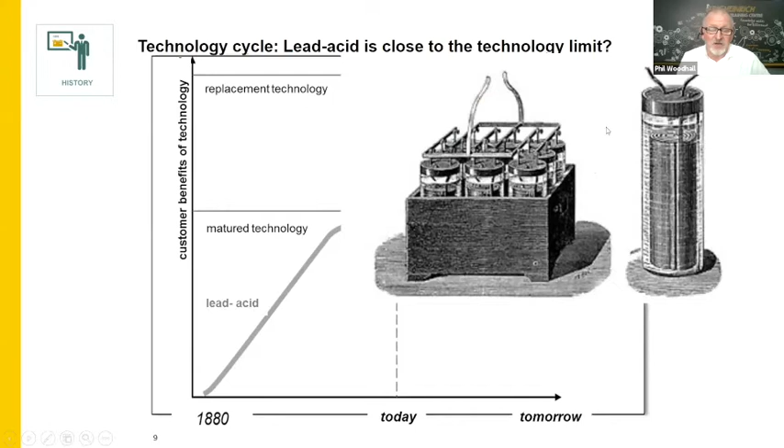And when you look at a lead-acid battery from then, it was still the same as today: two plates, positive and negative, immersed in an acid and creating a current. When you look at that from where it is today, nothing's really changed in terms of the concept of the battery. It's still creating a chemical reaction.

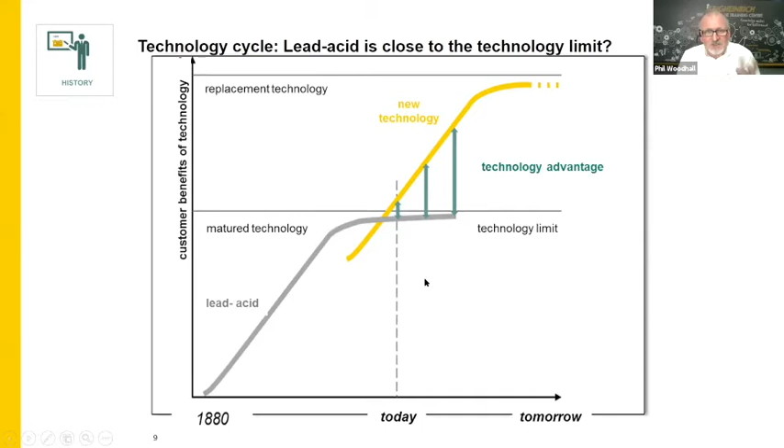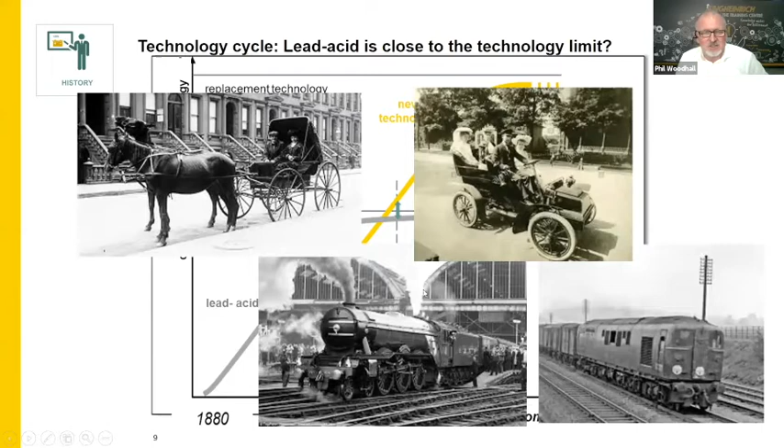Now, as time's gone by, the way that we charge and the charging technology have changed, but we're now at this step change in society, whether we like it or not, where we're looking for alternative fuel sources, not just from lead acid, but that can take over from byproducts of crude oil, such as LPG and diesel. That step change is the same size as when we moved away from horse-drawn vehicles to motor cars, or from steam trains over to diesel trains. Where we are now is that step change in society that is making a significant difference.

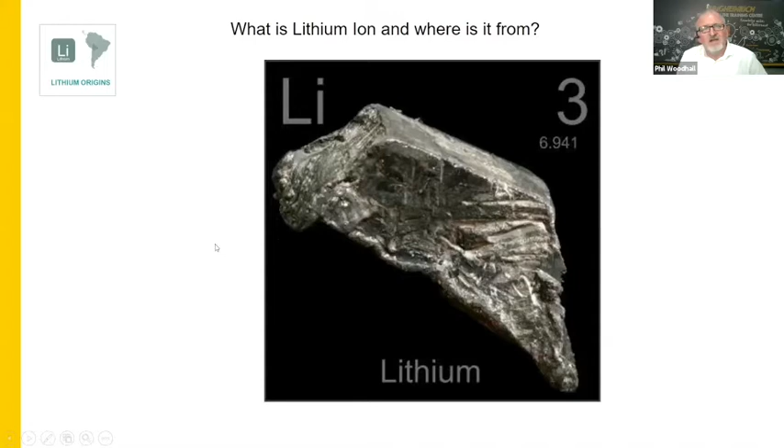So what is lithium and where do you get it from? Well, lithium is actually the lightest metal on planet Earth, and we need metals to create that chemical reaction, so that's a metal that delivers a higher density of power, but it's also much lighter. Now, when we look at where it's coming from, it's actually coming from the central equatorial belt. So any of the hot countries across the equatorial belt, you'll find it's available from, but the biggest resource globally is actually in Bolivia.

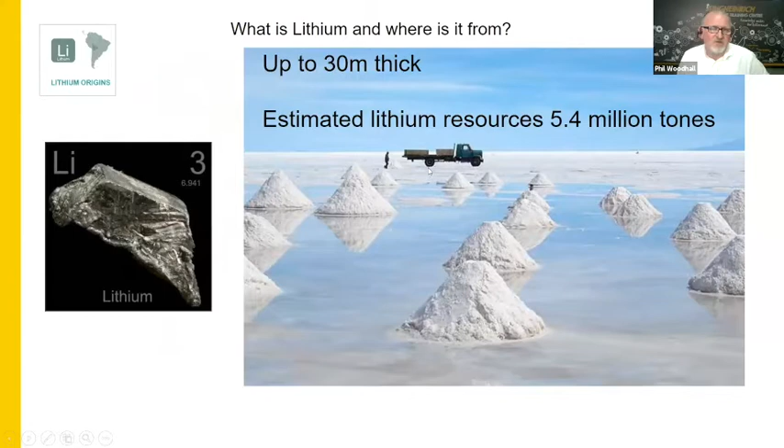When we look at what it is, it's actually a salt from a dry lake bed, but in terms of the resource, we're only using trace elements in lithium-ion, and it's not just in batteries. We've all known it for a long time with our digital watches and smartphones, but when you scale it up for forklifts, we need to know that it's a resource. There's actually more raw lithium than there is crude oil on planet Earth at the moment, so we need to look at this as a sustainable resource for the future.

And whether we like it or not, climate change is here, it's real, and we've got to take it on board ourselves, each one of us, to make sure that we are a part of that. So when we look at the future and how things have changed, I wanted to link it to the automotive industry, just to give you some ideas as to how fast things are changing.

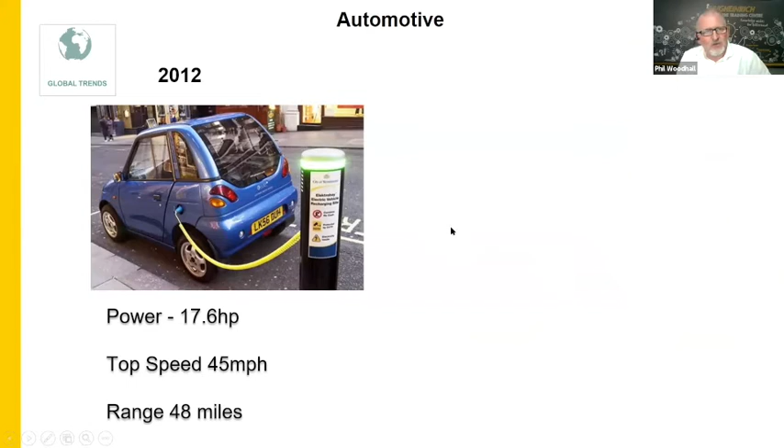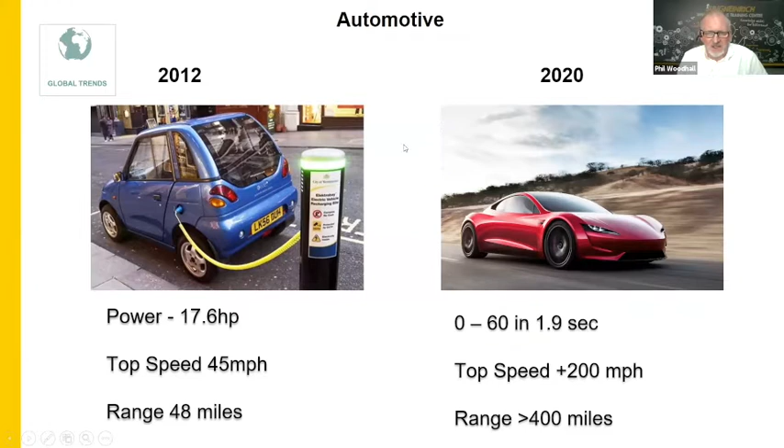A typical electric car from the late noughties through to 2012 looked like this, through to what we all know today. And we all know that the speed of change in just these 8 or 10 years is very, very significant. And the same is happening in our world as well, in the materials handling world.

But if we look now at lithium-ion, lithium-ion is the only battery that recharges faster than it discharges. So now we can start to harvest power, and from anything more than around 10 minutes, we can harness that power and put it straight back into the battery. And now we've got a resource that will actually start to serve us greater over a given period. Because of the density of the electricity as well, it will last far longer.

So instead of a lead acid battery lasting 1200 to 1600 cycles, which is probably around the 5 to 6 year mark, lithium-ion, because it's a denser supply and doesn't need any maintenance, will run for probably 7+ years. So you're going to get far, far greater use out of that energy resource.

So as we move on, you can see some of the benefits there: it is a sustainable source that gives us better energy density, but without any of the maintenance that's always been associated with lead acid. So let's have a look now at how this changes the truck design when we're working with a battery that is much lighter and delivers much more power.

If you take a traditional lead acid battery and you're designing a truck, you always had to work around the big box of the battery that was the bulk and in the heart of the truck, and then design the truck around that. So here, for example, you could take a lead acid truck and put a lithium-ion battery into it. But as time's gone by, what we've learned is we can actually change the whole design of the truck and make it completely fresh.

So here, for example, in 2011, Jungheinrich produced the world's first series-produced lithium-ion truck. What does this mean? That truck in that guise is not available as a lead acid option. It is a small battery, at that time 14 kilos, and the concept was to simply take the battery out, put another one in and send it straight back to work, and again that battery would charge very quickly.

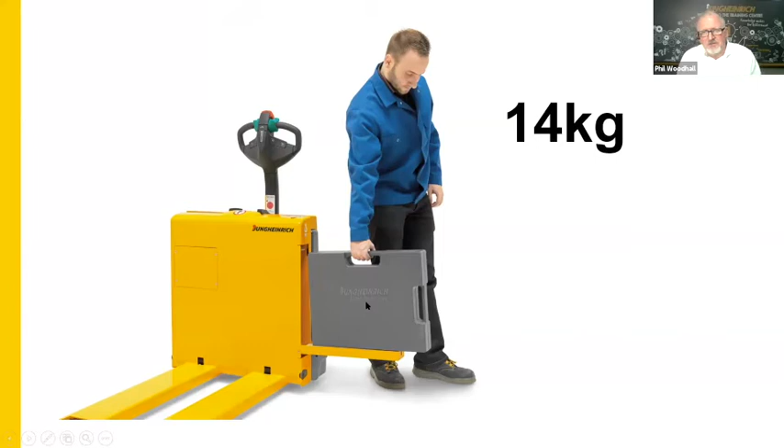As time's gone on, we've continued to develop it through the range, and then in 2017 Jungheinrich produced the world's first series-produced lithium-ion reach truck. And what you can see here is, again, not available as a lead-acid derivative. Now look at the shape and size of that battery.

If I just run a short animation here to compare the two side by side, on the left-hand side of the screen you'll see a lead-acid versus the right-hand side where you've got the lithium-ion. Now, as it pans round, you'll notice that on the left-hand side, it's the battery that's forming the weight, but on the right-hand side, the weight is made up by a cast iron counterweight. What this is doing is throwing the center of gravity much lower.

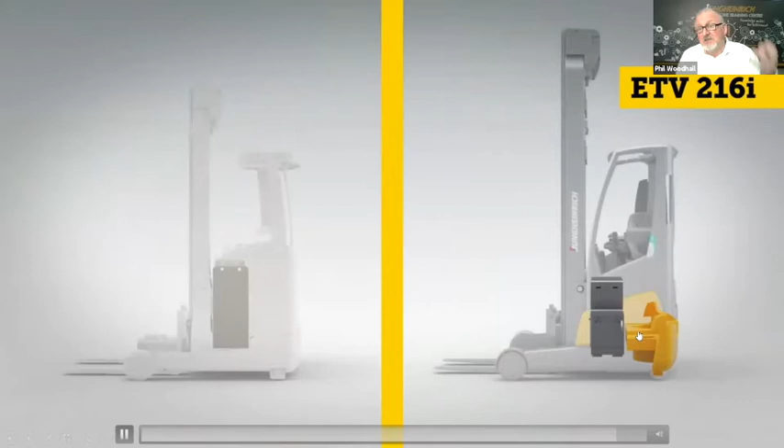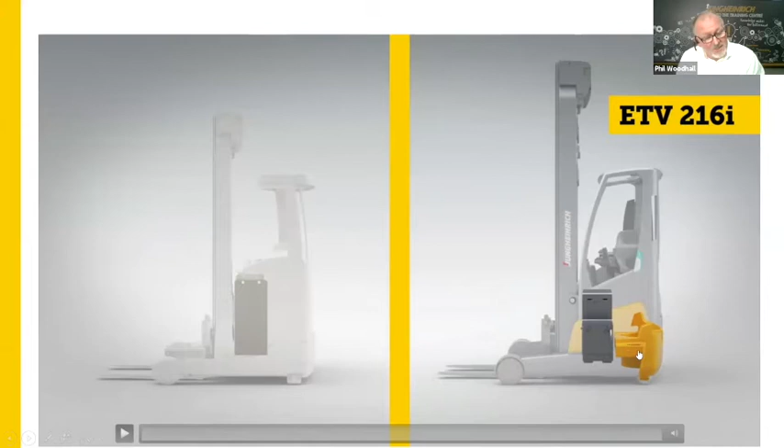Now, we all know as instructors that the lower the center of gravity, the better. Let me ask you a question. How many tall racing cars do you see? Not many, because a lower center of gravity makes things much more stable. So when we look at the design of a reach truck, it gives you better visibility all the way around because you've now put the battery much farther down into the chassis.

Looking to the future, in 2018 we also created a stand-on straddle leg truck where the battery is not forming any part of the counterweight, and again, it's only available as a lithium-ion derivative. What that means is that the weight is low down in the center, and you've now got a stand-up truck which allows the operator more space to work. And again, it's just completely breaking the mold as to what we've done before. Looking ahead to the future then, a sneaky peek for you.

If you look here, you can see a diesel truck. It's a diesel truck because you can see the exhaust stack. But if we now compare that to the new truck that Jungheinrich is producing very shortly, which is the Jungheinrich EFG P30i, exactly the same chassis, exactly the same mast. Everything is the same, but now this is lithium-ion powered. Performance numbers will be exactly the same.

So now you can see, here's the truck, how do you want it powered? So looking forward, you've got there a counterweight, and you can just see on the animation there, the battery is within the counterweight. So again, completely breaking the mold as to what's gone before. So that's looking now about the trucks in the future.

What we'll now look at then is about automation, because there's a lot of time now where we're talking about automation and what this actually means. We all know that we can sit there at night at home and order something and we expect it to be delivered the next day. But how does that happen? Well, I just wanted to point out that first of all, automation is not necessarily something that's new. Jungheinrich have been doing automation since 1963. So any operation over time that has always been repetitive, automation has always been there, a solution that's available for everybody.

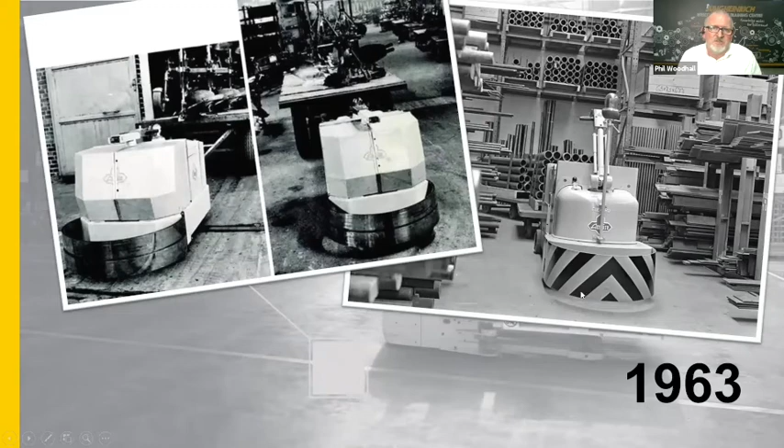Now, we already know about a manual operation because this is somebody sitting on a truck and driving it and moving product through a warehouse. But then you have two others, which is semi-automation and full automation. So these are the two I wanted to touch on. Now, any of these automations, whether it be full or semi or even manual, people now are looking to find marginal gains within their business that can make a significant difference to an operation.

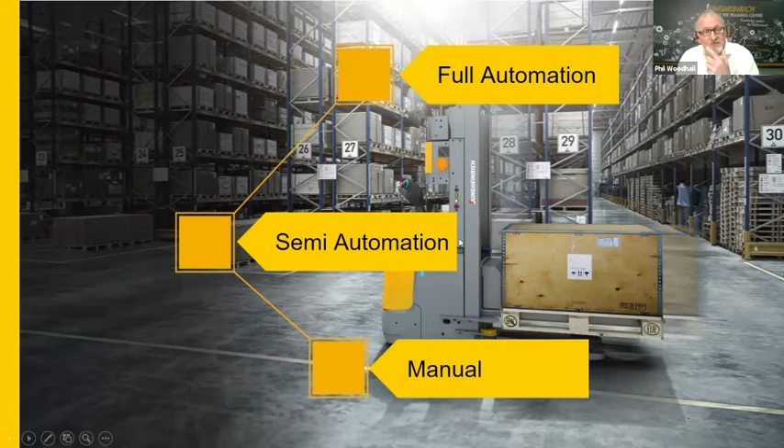So if we look at semi-automation and we consider this here where we've got a man-up order picker, we'll know that the lower they stay, they can travel fast, and as they start to lift, they then need to slow down. Or they can go up sooner and take the top line, but then that may take a little bit longer because they have to slow down.

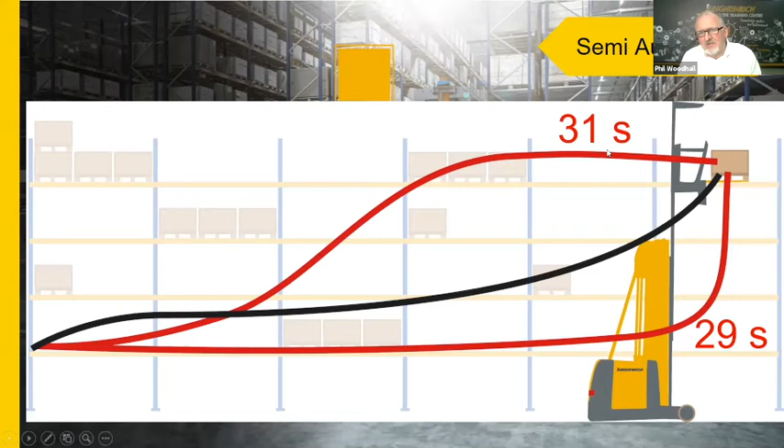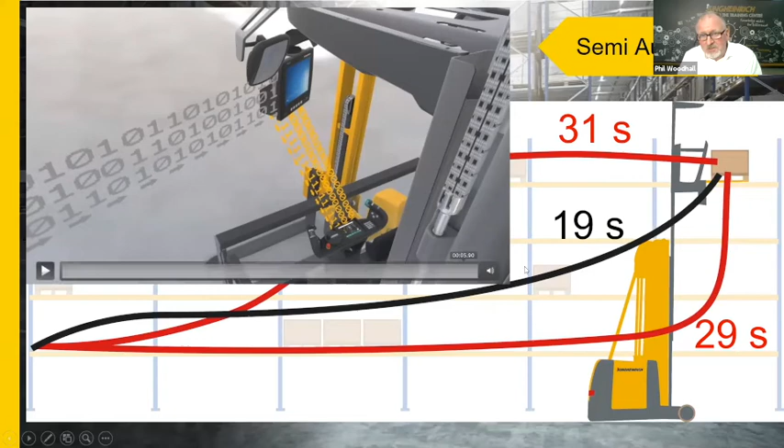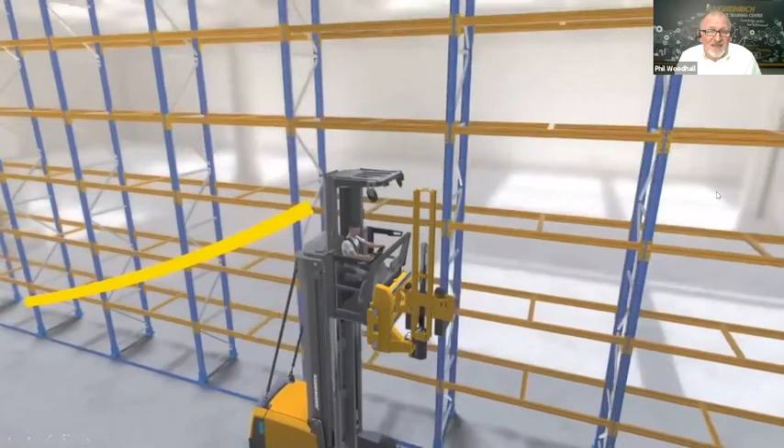Now, what's happening with semi-automation is where you have a signal coming from the warehouse management system directly into the brains of the truck, not just to the data terminal. So what this allows now is it tells the operator simply to drive forwards and up. The truck will then take itself in the most optimum route to that pick. Now, this is marginal gains that is being saved. But the point I'm trying to make here, yes, it's semi-automation, but there is still an operator.

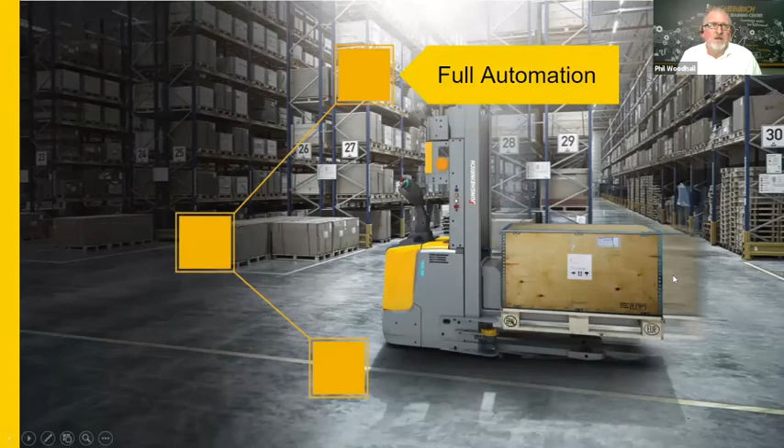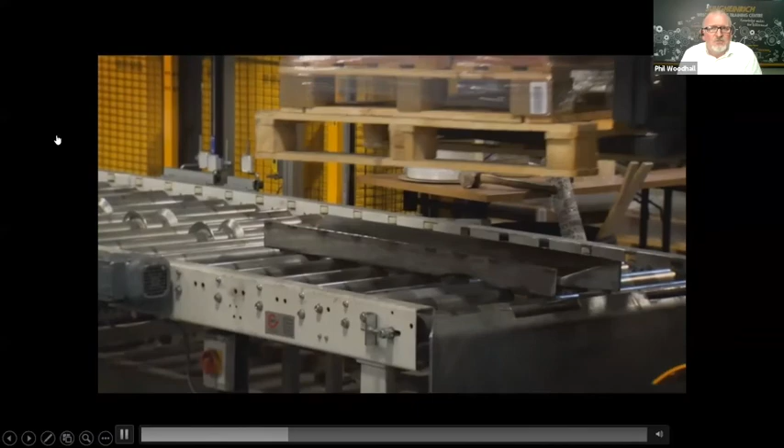So when we talk about full automation, people say, oh, it's the future. As I've just said, it's been around for a long time, so it's not just necessarily something that's happening today. Automation is about no drivers at all, and the operation is completely autonomous. However, automation, yes, it is very effective. 15 to 20% of the potential market that's out there is suitable for automation. It's not going to load lorries on the yard, and it's not going to do many of the operations, but if it's repetitive and it's high storage density, then yes, it will be a solution for people.

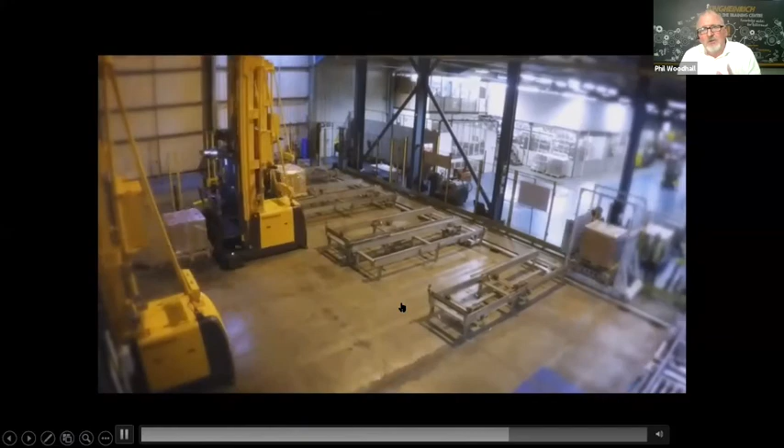But as you can see here, what I want you to notice when you look at this video, it's still being fed by forklift trucks, and there are also manual operations taking part within what is essentially a fully automated site. The market currently is standing at around 35,000 units, and it's forecasted to drop by 2030 to around 26 to 27,000 units. So that doesn't necessarily mean the whole market is changing. It's probably going back to a point where it was around 7 or 8 years ago.

So there's always still going to be a need for training within a fully automated system. This could be for training either operators, people who are working it, people who need to check it, safety checks, etc. So this is still something that will need training in an environment such as this.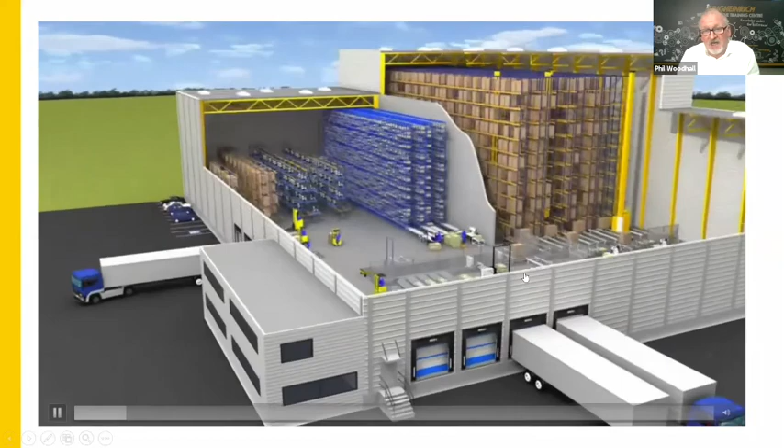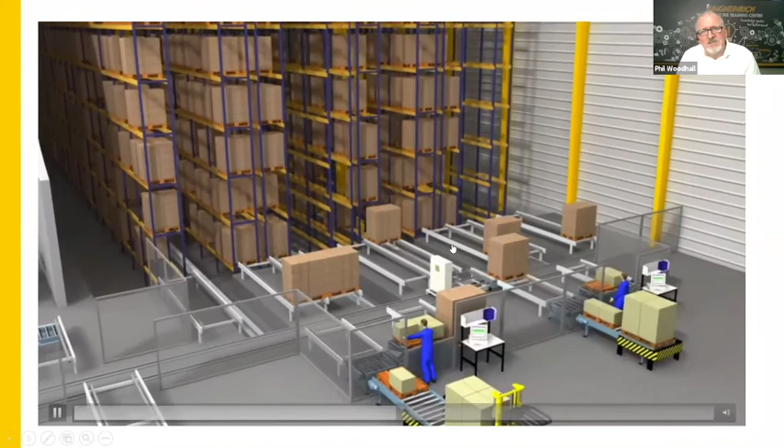When you then look at a typical warehouse operation and what you see here, Jungheinrich as a full range supplier can supply everything within this operation other than the lorries and the people. But what you will see is that there are still operators operating within this, even though it is shown as a fully automated system. So it's about taking marginal gains and making any change that's necessary to stay sustainable, not just today, but into the future.